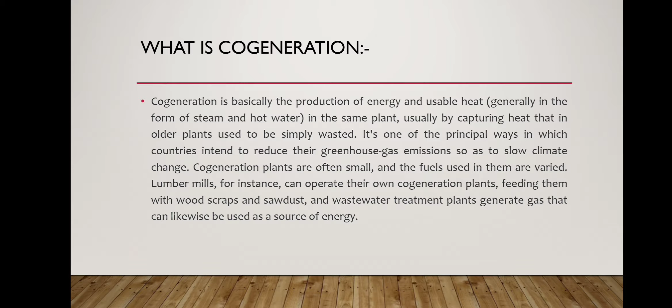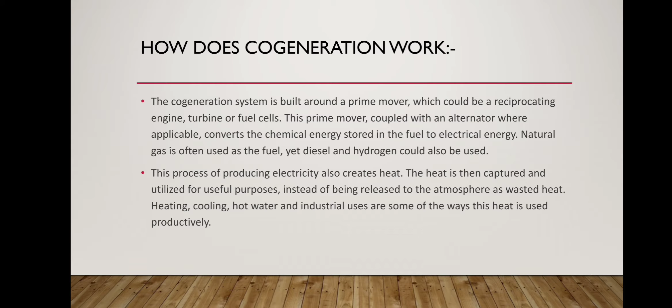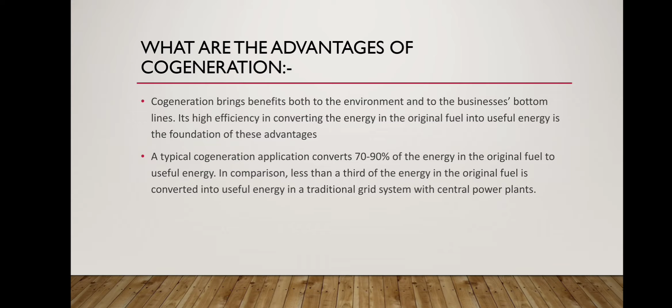This slide is about advantages of cogeneration. Cogeneration brings benefits both to the environment and to the business bottom line. Its high efficiency in converting the energy in the original fuel into useful energy is the foundation of these advantages. A typical cogeneration application converts 70 to 90% of energy in the original fuel to useful energy. In comparison, less than a third of energy in the original fuel is converted into useful energy in the traditional grid system with central power plants.

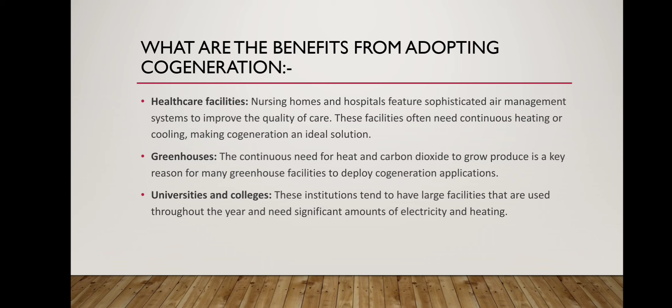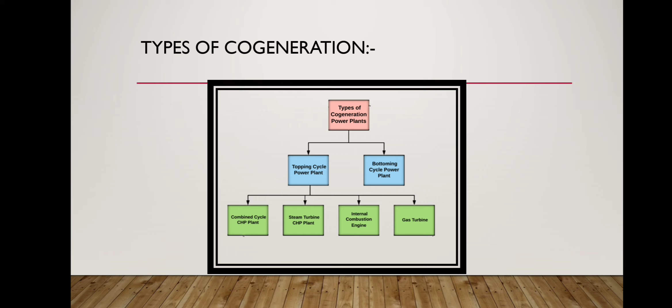So let's move to trigeneration. Trigeneration is usually the simultaneous production of cooling in addition to heat and electricity through a single fuel source. Trigeneration is also known as combined cooling, heat and power, in short CCHP. Some trigeneration applications produce electricity and recover heat while simultaneously utilizing the carbon dioxide from the exhaust. The CO2 is used to aid in photosynthesis of plants in greenhouses or carbonation of beverages in bottling facilities.

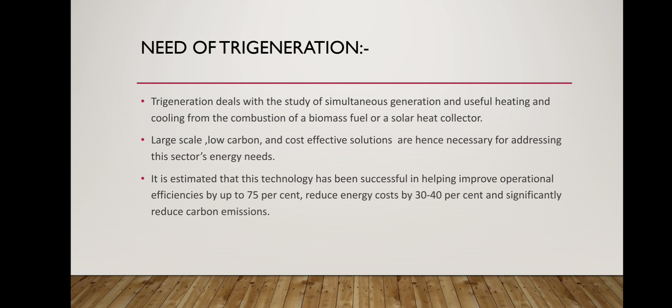Need of trigeneration. Trigeneration deals with the study of simultaneous generation of useful heating and cooling from the combustion of a biomass fuel or a solar heat collector. Large scale, low carbon and cost effective solutions are hence necessary for addressing the sector's energy needs. It is estimated that this technology has been successful in helping improve operational efficiencies by up to 75%, reduce energy costs by 30 to 40%, and significantly reduce carbon emissions.

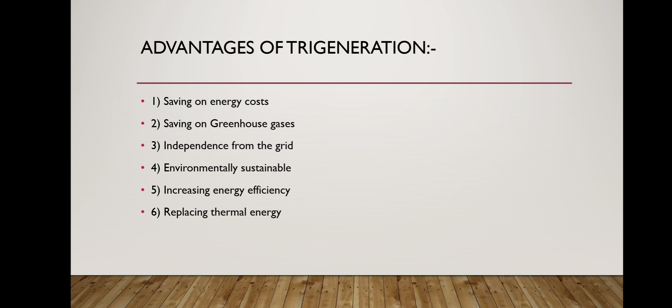Advantages of trigeneration. First is saving on energy costs. Second is saving on greenhouse gases. Third is independence from the grid. Fourth is environmentally sustainable. Fifth is increasing energy efficiency. And sixth is replacing thermal energy. Thank you friends for listening.